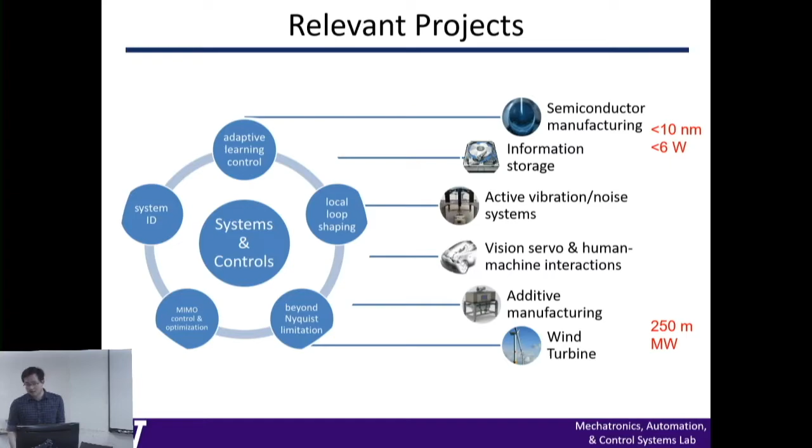And I took some of the projects that I have done in the mechanical system domain. Some of these projects are very, very high precision, below 10 nanometer scale precision. Some of these machines are very, very large, hundreds of meters in scale. But the common thing is we want these machines to have a certain kind of intelligence. And here are some examples about this kind of intelligence and how adaptive control and system identification is useful.

The example here is a few years ago, your computer would still have hard disk drives. Now they go to the enterprise storage, the cloud. But they all have this common scenario. This is a nanometer scale precision system, sub-10 nanometer scale position error tolerance. And these disks, they spin so fast that the airflow inside this mechanical enclosure is very sensitive. And if you tap your hard disk drive quickly, you may fail this drive.

There are incidences where at the bank, all the hard disk drives somehow died because there's a construction next to the bank, and the vibration from the ground just makes this mechanical system fail. And it's a very complicated process. Amazingly, they still work. $70, right? They can do a terabyte of storage. But the problem that they face is very, very challenging.

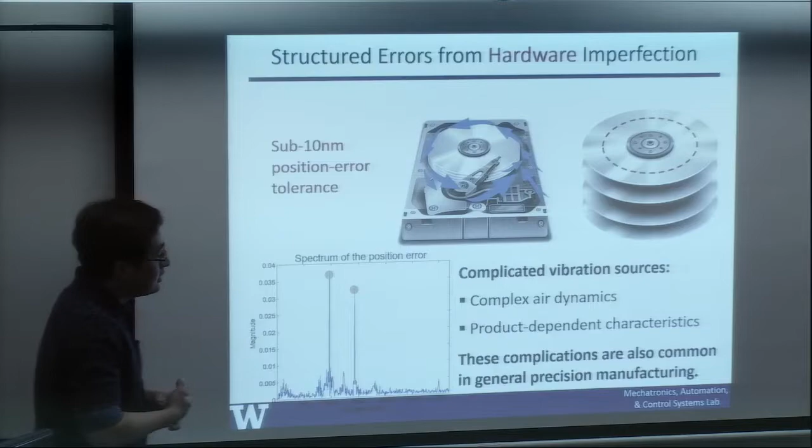Vibrations happen in different frequency regions. And these complex aerodynamics make it very difficult to know exactly where these vibrations happen. And different products, they may change these vibration characteristics as well. And these are very general problems for precision manufacturing.

So in data centers, they have this problem. They call this so-called audio or acoustic vibration. If you've ever been to a data center, you will know it's so loud, you cannot bear to go inside without wearing a headset. So the problem is actually more involved than you would think. As engineers, we solve a problem by looking into the details.

So the problem is actually, it's not really the voice or audio that impacts these mechanicals and creates the vibration directly. It's because if you have a very loud noise, it's going to shake the mechanical mechanism. And that shaking can create, for example, resonances, resonant behaviors. And that will break the mechanical system. All right? And this is even more challenging if it's acoustic or audio related.

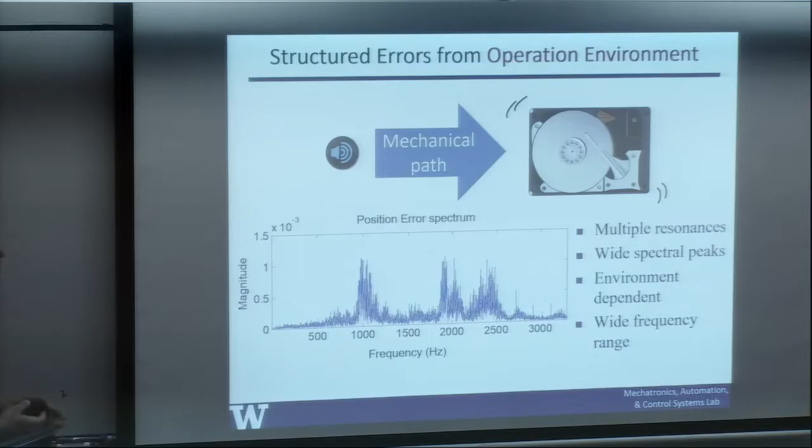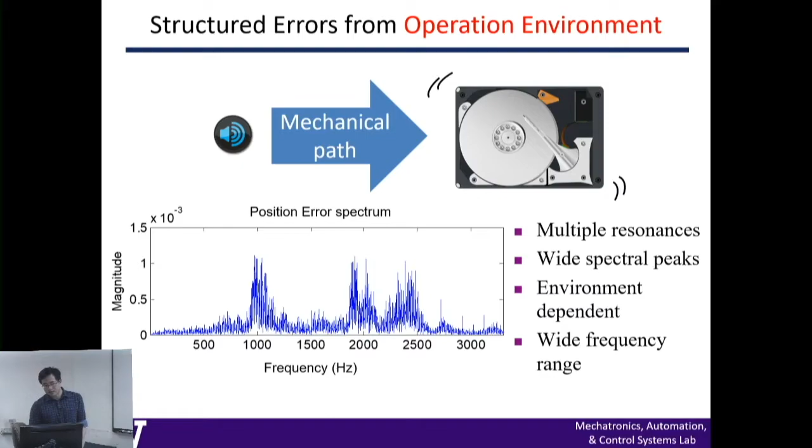Acoustic is something interesting in the sense that they are very broad band. You can see here hundreds of hertz in the width. And then there are different bands. Human voices, if you take a recording, you will see it's actually spreading in a broad range of frequencies. There are multiple resonances and wide spectral peaks, and they depend on environment as well. So these wide band frequency vibrations are actually a very big headache for any precision mechanical systems.

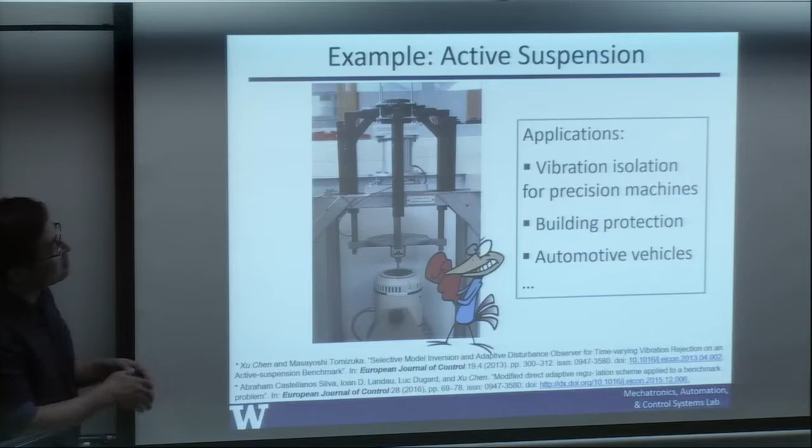Another system that is relevant, you can imagine these in real life scenarios: you have suspension systems in cars. Without suspension, if you have driven an older generation of cars, you will see it's very bumpy. So active suspension is very important. It's very important to be able to isolate vibrations from precision machines. These vibrations can be from the road or can be from other factors from the environment.

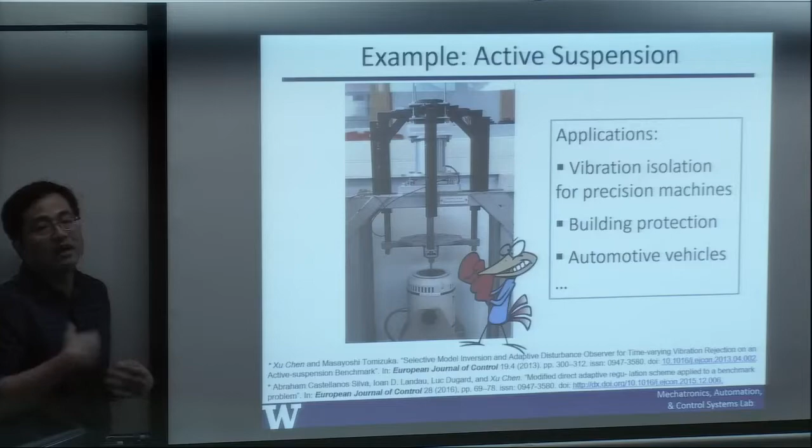All right. So the basic mechanism about this active suspension is, I think, it's like boxing. It's like you predict the person who you fight, maybe the road. You're trying to fight against the road. If someone is trying to punch you, you may take a few punches at the beginning, but you may be able to dodge it as you learn from the pattern of these vibrations. So once you can do that, adaptive control can enable you to accommodate these vibrations.

This is without active adaptive control. This is with active adaptive control. This is the baseline noise, and this is the performance that we can gain from adaptive control. You can see basically we have removed entirely the vibrations. You can see this from the time domain. You can see this also from the frequency domain, where these black dotted lines have been completely removed. Black dotted for the bottom two figures, red solid lines in the top right figure.

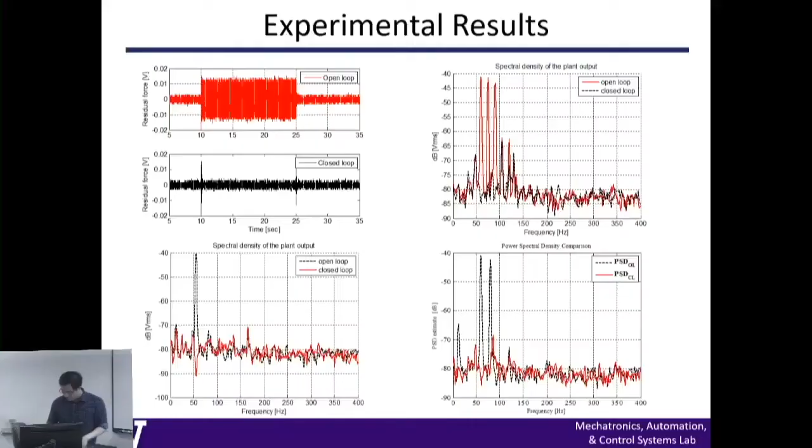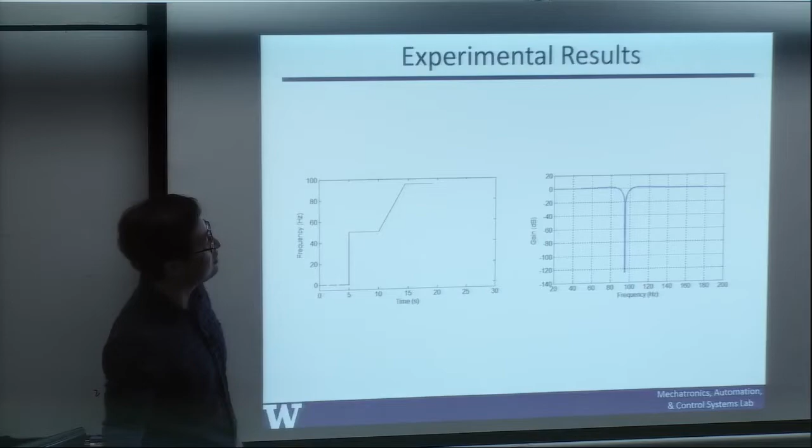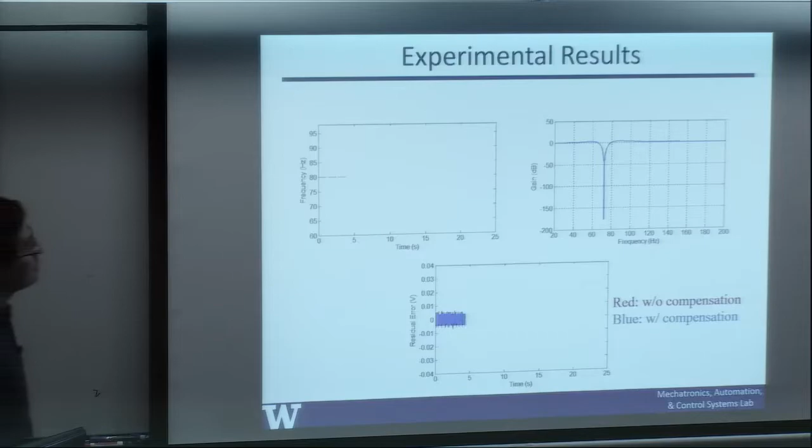So the way that we do it is essentially using techniques in this class. Vibrations are frequency dependent, so adaptive control enables you to predict the vibration frequencies. It actually enables you to follow even if the frequency changes for these vibrations. This is for the case if there's a single frequency component. This is also the case if there are multiple frequency components. And it is happening very fast as well. You can see this is within seconds, probably milliseconds, we can do these adaptations very quickly. And this is the time domain performance. So that is for this active suspension system.

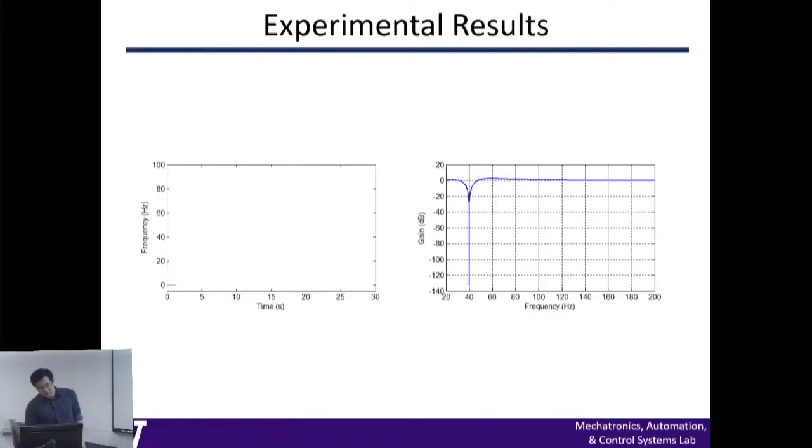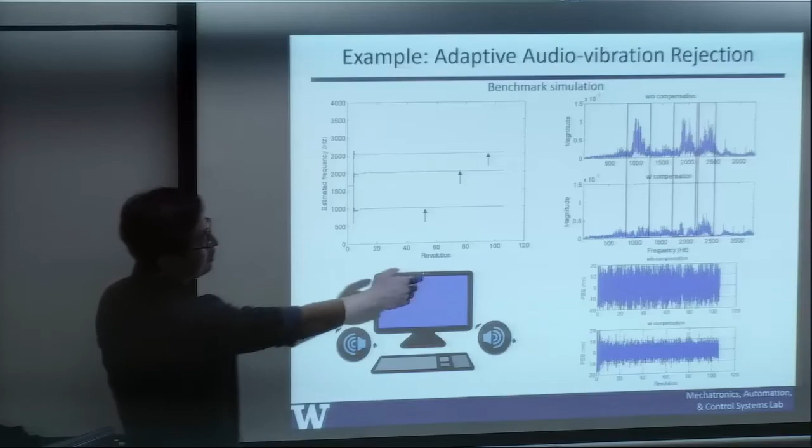This is also the case for the previously mentioned audio vibration rejection problem. At the beginning, we don't know anything, we don't make assumptions about the vibration frequencies. We just learn. So the adaptation kicks in from here, and very quickly we're able to find there are 3 peaks in these vibrations, and then the frequencies of these peaks are identified, and after that you can apply controls targeted at these frequency components of the vibration. And then on the bottom, these are the results that you can achieve.

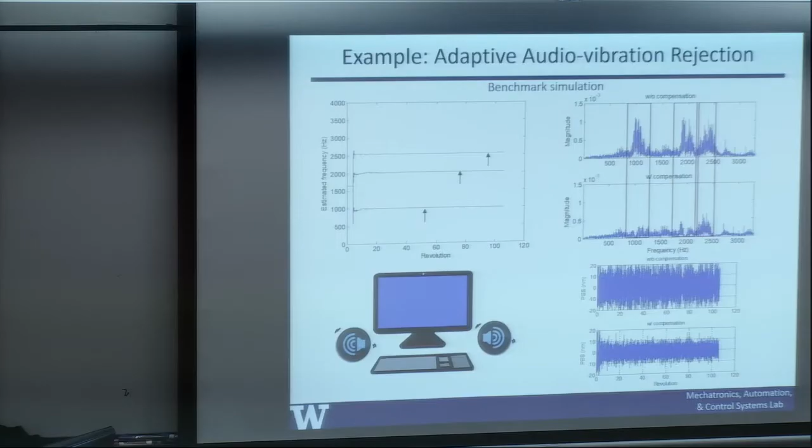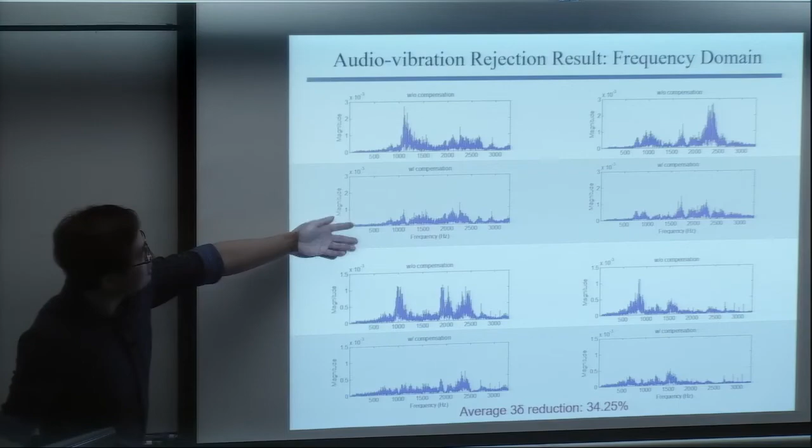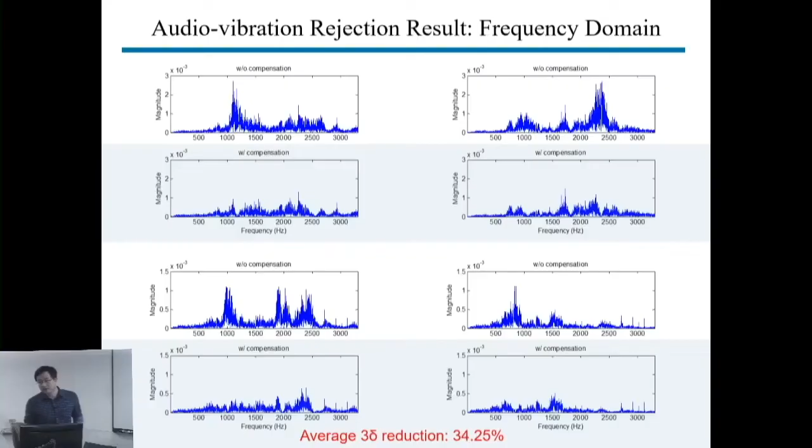Okay, so the beauty about adaptation is you can do this not just for a single case, but for different types of vibrations in practice. So you can see 4 different cases here, and the results are pretty significant for nanometer scale precision devices. If you compute the 3 sigma value, it's actually 34%, which is very difficult to achieve with other techniques. If you do PID, it's impossible to accommodate these kinds of strong vibration components. Okay?